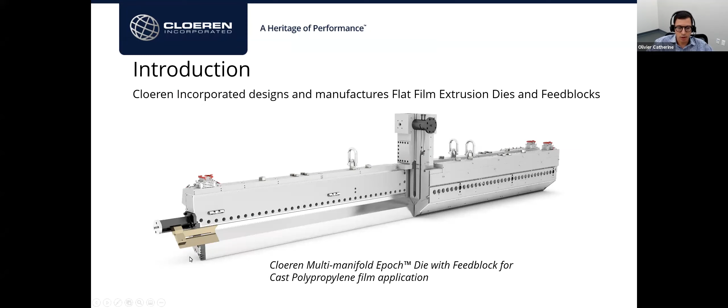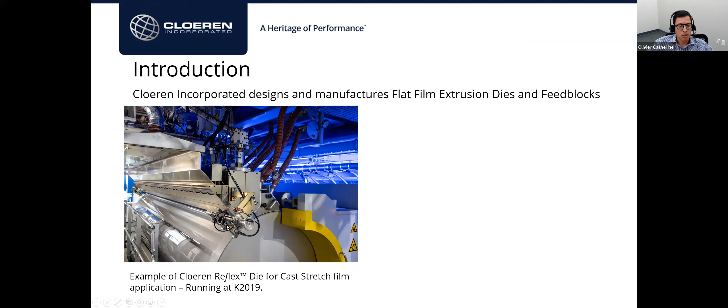So many applications are coming from our products. For example, cast stretch film, as I mentioned, is a big application for us. But there are many, many other applications where cast film and sheet is used by our customers, produced by our equipment. For example, here's a PVB interlayer that's used for lamination of glass panels for windshields.

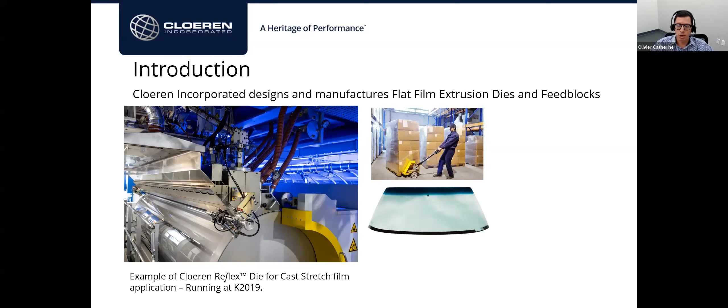Medical applications such as blood bags, a lot of flexible food application, as well as other food applications such as milk cartons and rigid packaging.

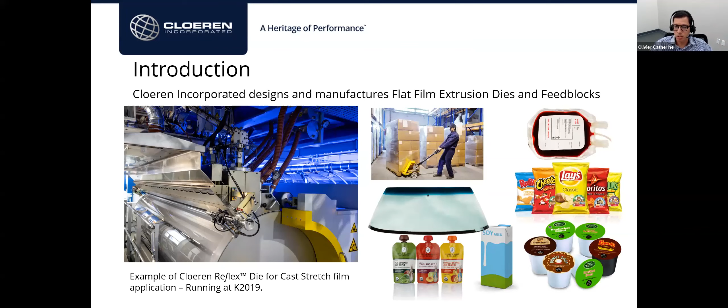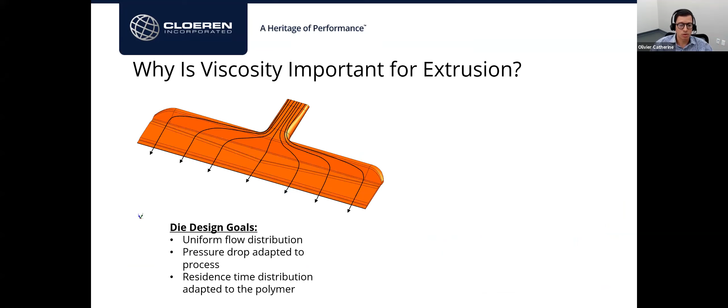So why is viscosity important for extrusion? When we design dies, we are really trying to optimize many things. The main goals are really to design a die flow channel that will deliver a uniform flow distribution. Also, the pressure drop through the system needs to be adapted to the process and the material. And finally, a residence time also needs to match what the polymer can tolerate for this application.

So if you look at a simplified system, simplified equations to calculate pressure drop through such a system, which is made of a manifold, which we can simplify into a pipe flow, the pressure drop is directly related to the output or the flow rate through the viscosity parameter.

In parallel plates, such as the pre-land or the lip land, you can also link the pressure drop through those sections of the die to the flow rate locally through polymer viscosity.

These equations are simplified for Newtonian fluids, and in most cases, polymers are not. Also, viscosity is shear dependent, or shear rate dependent, and also temperature dependent. But the point is that viscosity is critical to size and optimize the system to reach the three goals that we just described.

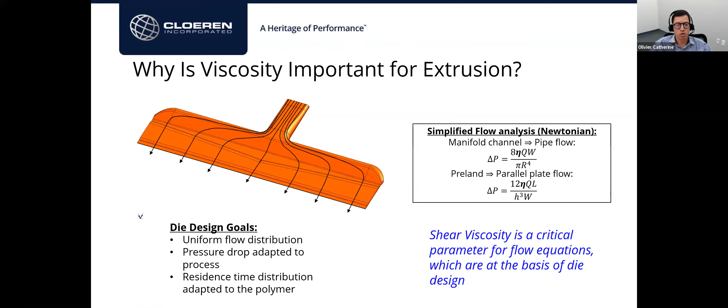Polymeric materials are non-Newtonian materials due to the fact that they are macromolecules. As you're gradually shearing these macromolecules, you're starting to disentangle the macromolecular structure, and when you do that, the structure will tend to recoil. There's a competition between how fast we are disentangling the system due to shearing and how fast it can recoil.

This is the shear thinning effect. You can see the viscosity is initially at low shear rates Newtonian, then starts to shear thin. Eventually we are shearing the material so fast that everything is disentangled, and we reach another theoretical plateau at low viscosity and high shear rate. For polymer melts though, we rarely see that plateau because we are in a shear rate region that's more covering the Newtonian plateau, the transition region, and the shear thinning region.

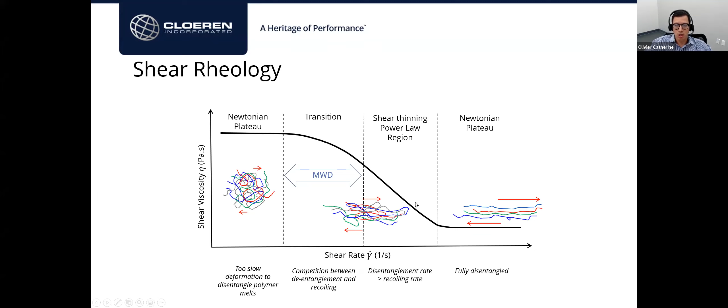So what are the typical measurement techniques available in our market? Well, the first technique that's very widely used is the melt flow index. But I'd say that this technique, even though it's a standard, has very low value to us.

The way it works is as shown here - it kind of looks like the COVID vaccine a little bit, huh? You are melting a polymer and pushing it with a standard weight, collecting the material coming out for a time of 10 minutes and measuring that weight. So you have a pretty meaningless unit of grams of polymer per 10 minutes with this size of weight that you used at a given temperature. So it's very hard to translate that number into something meaningful to design or troubleshoot any process.

However, it's an industry standard, and it's a simple way to quickly compare different polymers, and or within the same family, let's say, and also to do some QC for example. Although I think there's different or better ways to do that.

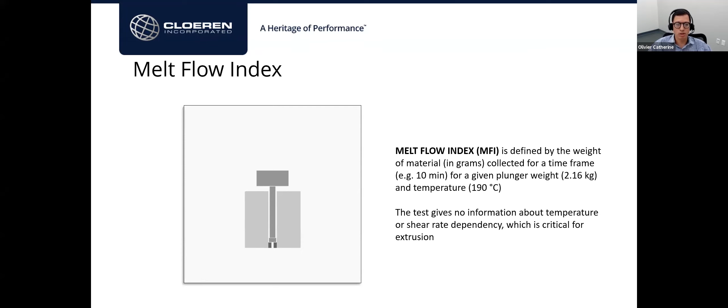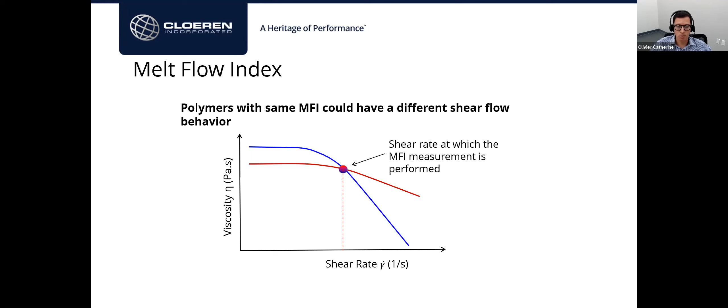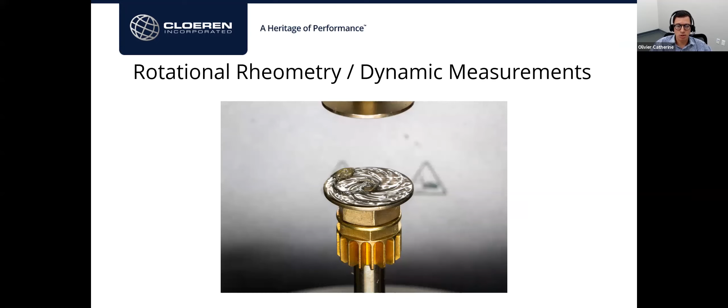So other techniques that we, for example, use in our lab here: rotational and dynamic measurements. And the main reason is that this technique can bring a wealth of information regarding viscoelastic behavior of the material.

So there's different ways to perform measurements, but here I'm showing a typical setup where we use either a cone and plate or a parallel plate geometry, and we use the equipment in small amplitude oscillatory shear experiments. So basically we are shearing the material at a frequency, and we're going to vary that frequency.

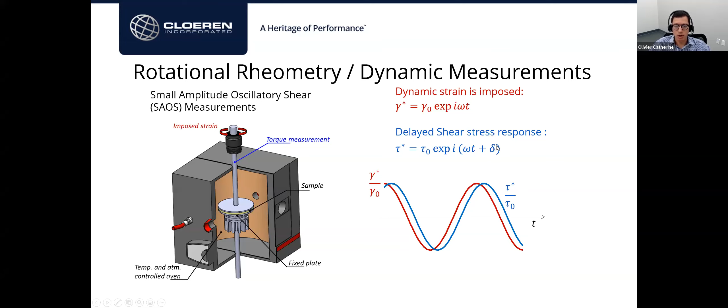This is a representation of the strain and response in shear stress for the material. The main thing is that as we impose the strain, we are going to see a delay, a shift in time for the response in shear stress, which is shown with this delta value. From there, we can derive many viscoelastic parameters that are quite interesting.

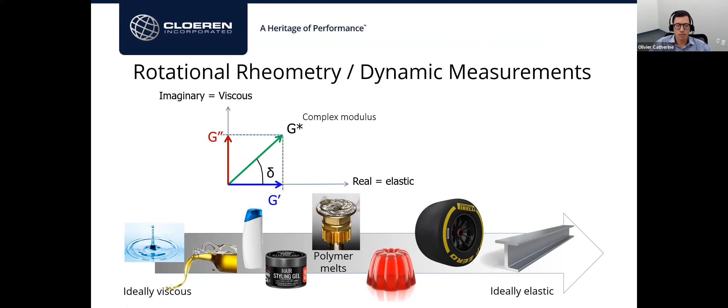So what we are representing here is the different components of the complex modulus: the G double prime, which is the more viscous component of the modulus, and the G prime, which is the elastic component of the modulus.

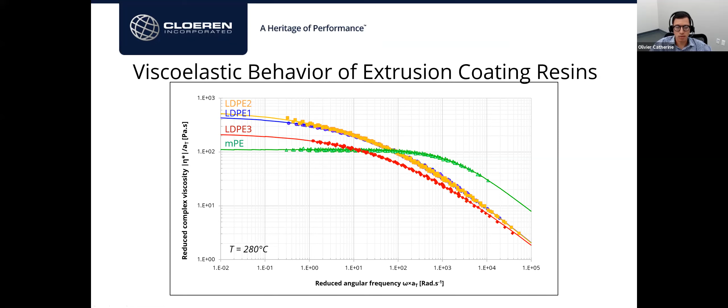All right, I will really talk about capillary rheometry very soon, but I'm trying to cover all the different techniques here. One nice feature also about these type of rheometers is you can change the instruments or the measuring devices and have access to a lot more information. And also you can explore the molecular structure of your materials.

For example, here, a tool I really like is being able to measure transient extensional rheology. And the way it works, we basically use a piece of film of a given sample and melt it in a convection oven, and then we start stretching it with those rotating drums.

We could see what's going on in the oven there, and once the polymer is melted, we started stretching it and measuring torque. As we do that, we are able to convert those values into a transient viscosity over time, and compare that to the Troughton ratio, which is basically the shear viscosity multiplied by 3. We are able to detect or compare behaviors of materials in extensional mode.

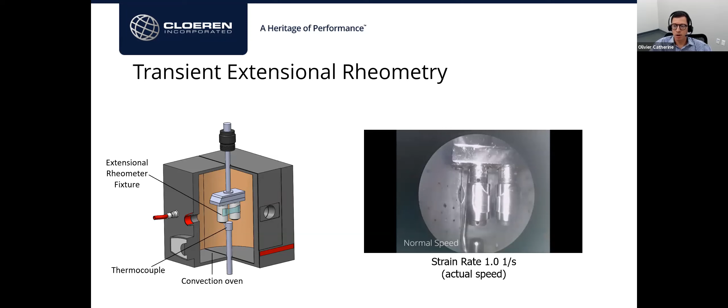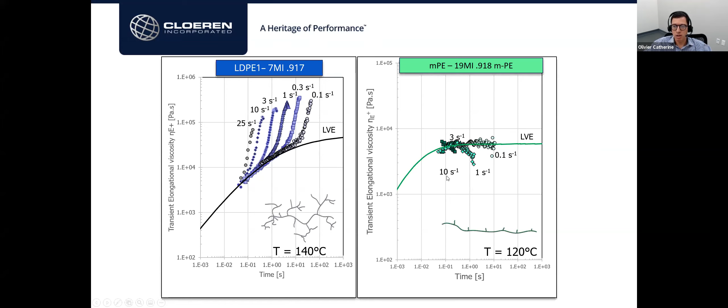As you can see here, the metallocene grade, very linear molecular structure, did well. The measurements were actually quite difficult, but you can see that there's no strain hardening at all at any strain rate. So these tools are really great to compare viscoelastic behaviors and investigate the molecular structures and relate that to processing.

All right, capillary rheometry, which is really the topic of today. I put here a picture of the new Netzsch RH 2000 and 2200, which is basically a dual bore version. This is the rheometer we use in our lab, and a great rheometer to complement all the techniques. We use both our rheometers all the time, but this is a very busy piece of equipment.

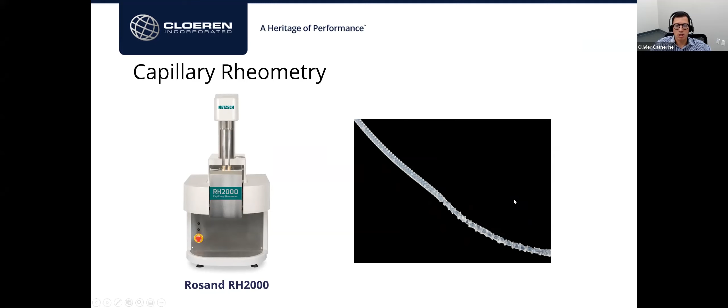Here's an illustration of melt fracture. This is one nice feature you can detect or observe in the rheometer.

So the principle is similar to that of the melt index, except that this now is instrumented. So the principle is that we load the polymer pellets in a barrel, in a heated barrel. The temperature of the barrel is controlled very precisely through a precise controlling system and measurement system, a thermocouple embedded deep in the metal of the barrel. Once the polymer is melted, we push it, but the main difference compared to the melt flow index is that we're not using a weight there, a dead weight. We are using a controlled speed system, so we are able to control the speed very precisely. And through that, we control the flow rate, and the polymer is now flowing through a capillary die.

So this is a little too small, so if you move to the right side here, you have a blown up version of this picture. The capillary die is a very precise channel of known dimensions, namely the length and the capillary diameter. And from these features, we can calculate shear rate.

As we are pushing the material at a controlled speed, we are measuring the pressure that is resulting from this flow. The pressure is measured through that membrane type pressure sensor. And from the pressure, we are able to calculate the shear stress. And the viscosity is basically shear stress divided by the shear rate. So this is fairly simple in theory. However, there are some corrections necessary to get to the most precise, most meaningful measurement.

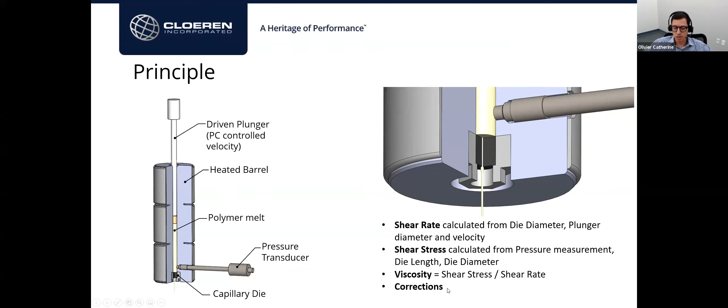The first correction is the so-called Rabinowitsch correction. So when we calculate shear rate, we actually apply, again, simplified equations that assume the material as being Newtonian. And the equation only uses the flow rate of the material and the radius of the capillary or the diameter of the capillary.

But as we are dealing with non-Newtonian materials, the velocity profiles are changing as the material is flowing through the capillary, as shown in this graph here. So a fully Newtonian material would be that dark purple color. And as the materials become more like shear thinning materials, more pseudoplastic or less Newtonian, you can see that the velocity profile tends to flatten, and eventually, even for a completely pseudoplastic index of 0, you have this black line here. Now, shear rate is the slope of this velocity profile at the wall. So as you can see, the shear rate is affected by how non-Newtonian the material is, and the slope increases as the material becomes more and more pseudoplastic or less Newtonian.

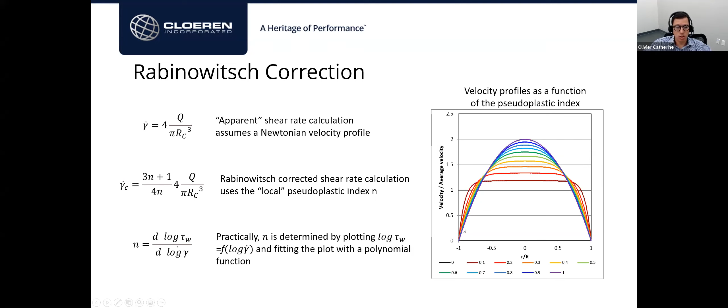That's the correction proposed by Rabinowitsch, which uses the n value, a local pseudoplastic index. Physically, or practically, how do you do that? You basically calculate the n value with a polynomial fit of the log of the wall shear stress as a function of the log of the apparent shear rate. You fit this and you're able to determine the n value. And of course, there are different ways to fit that. You can do linear fits or a higher degree polynomial fit. So this is what I'm showing here.

The second correction is a so-called Bagley correction, explained by the fact that the pressure sensor is physically limited to a location upstream from the capillary die. Of course, when we want to calculate the shear stress at the wall of the die, we would need to use the pressure drop through the die. However, the measured pressure, because of the location of the sensor, is a combination of different features.

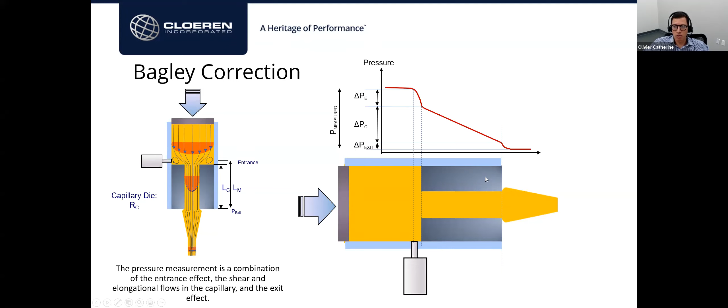The Bagley correction consists in trying to determine this entrance pressure by changing the L over D ratio of the die - that's the historic Bagley correction. Basically you would plot the pressure measurement as a function of different L over D ratios. You would have to use 3-4 different dies, repeat the measurements, and collect pressure as a function of this L over D for different shear rates. In the end, at the intercept, you can calculate the entrance pressure, or with the slope you can directly calculate the corrected value of shear stress.

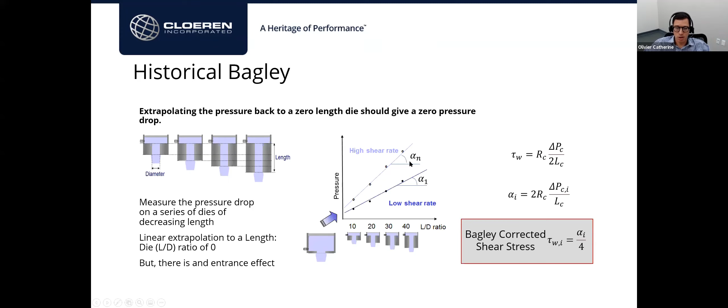This is something I've done a lot, especially when I was in college, and I can tell you it's a lot of work.

Thankfully, on the Rheometer that Netzsch is selling today, you have an option for dual bore, and this is a must, because this dual bore option will give you the ability to measure pressure simultaneously on 2 different bores with 2 different dies with 2 different L over Ds. Specifically, they have an L over D die close to zero - here we call it orifice die or zero length die. It is in fact 0.25 millimeters, if I remember. Basically with this, on the right side of the rheometer you are measuring the entrance pressure, and you deduct or remove it directly from the left side measurement, and you have a 2-point Bagley correction, which is very accurate and very, very efficient.

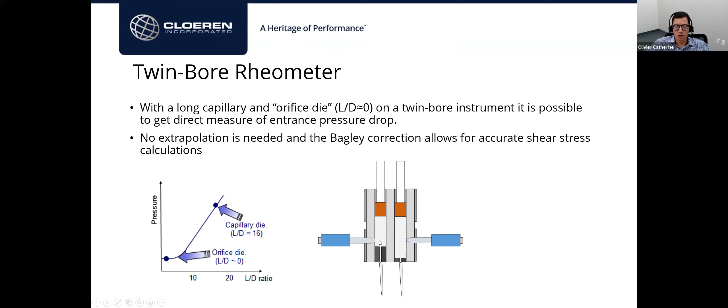In some cases, this can have a huge impact on how you design your extrusion equipment, because at high shear rate, you could have some pressure estimations that are wrong if you're not applying the correct corrections.

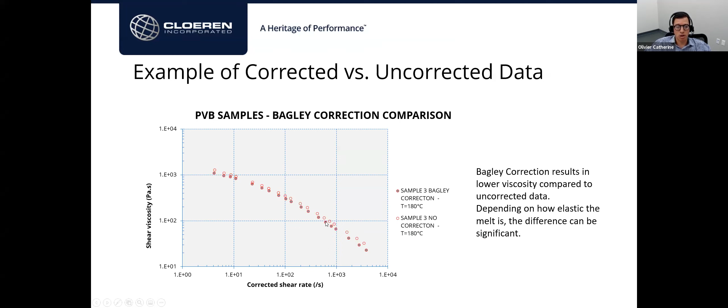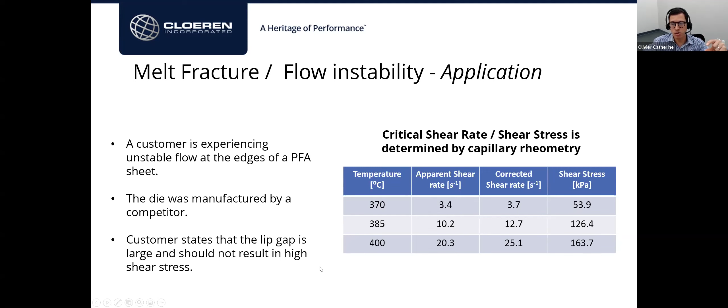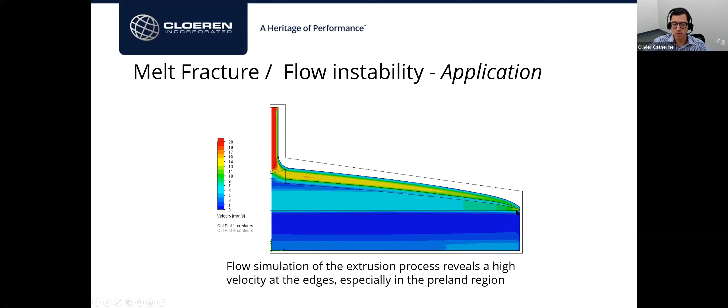When I looked at a map of shear stress calculated from a flow simulation, I found that the shear stress was higher than the critical value in the pre-land region, so not at the die lips, but upstream. So I think what's going on is that we are starting to see some flow instability in the die flow channel, and this flow instability will not dampen but will actually continue to be unstable as the material is flowing out of the die. And that's exactly what they saw at the edges of the sheet there.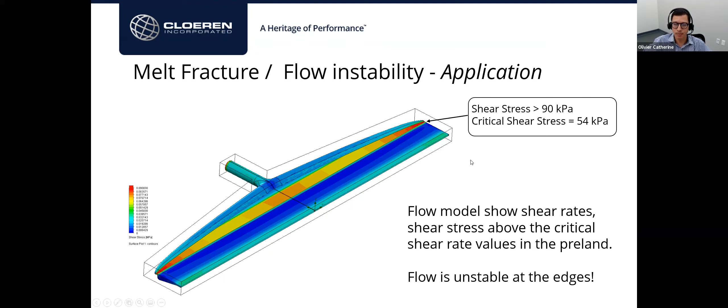Another great feature of the Rheometer is being able to observe how stable materials are. Sometimes it's a fight because we have material that tends to degrade before we're done with our viscosity measurements. But I can also use the Rheometer as a device to determine if the material is stable or not.

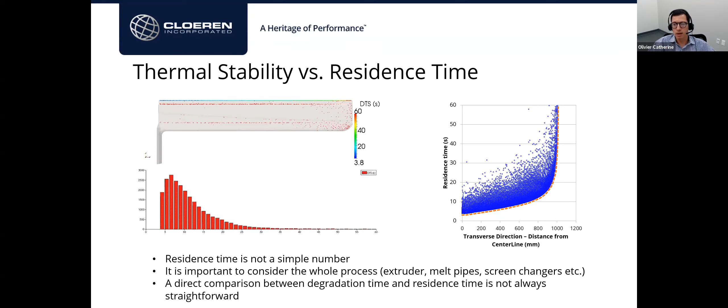So while it's nice to have information on how fast material degrades from rheology, it's hard to directly apply it to the system, or at least we have to keep in mind the system is complex and it's not just a 5-minute residence time. However, you can use this method to compare if one material is stable through the system versus another that's not. Comparing from the rheology lab to the process, you can apply and troubleshoot.

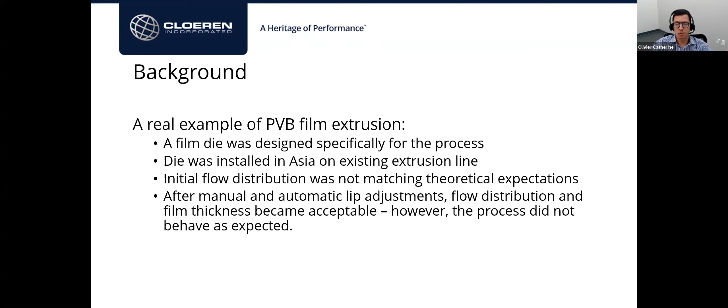I wanted to discuss really quickly a troubleshooting example - a specific case of PVB film that I've done in the past, and I thought it was quite interesting because this is a real-life extrusion application. We designed a die for a specific process, and the die was installed in Asia, so far away from here. This was on an existing line, and we had some very different results with the die, or the system, than we were anticipating.

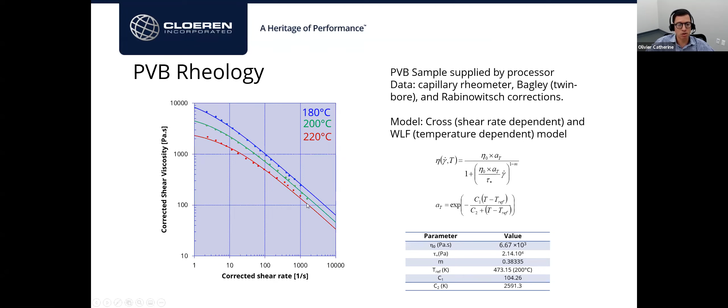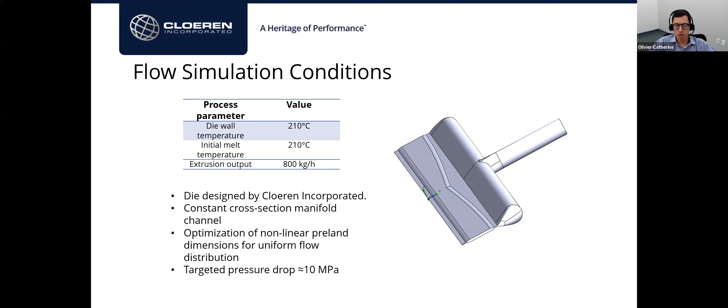From that, we designed a die based not only on the viscosity measurements but also the process information given by the customer. The die would be set at 210, the melt temperature set at 210 C, extrusion output is 800 kilos per hour, and we designed the die, optimizing the flow channel with the 3 main parameters: uniform flow distribution, pressure drop - in this case targeting 10 megapascal or 100 bars - and of course a residence time that makes sense with the temperature and material sensitivity. These materials seemed fairly good, actually.

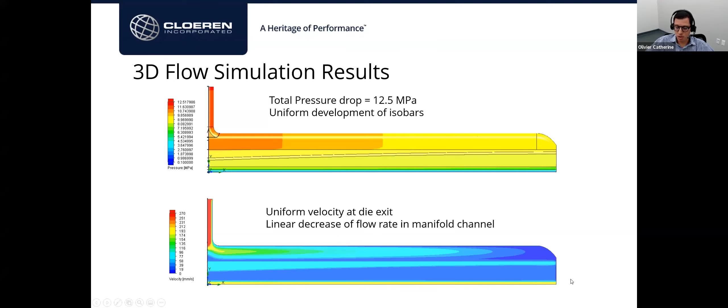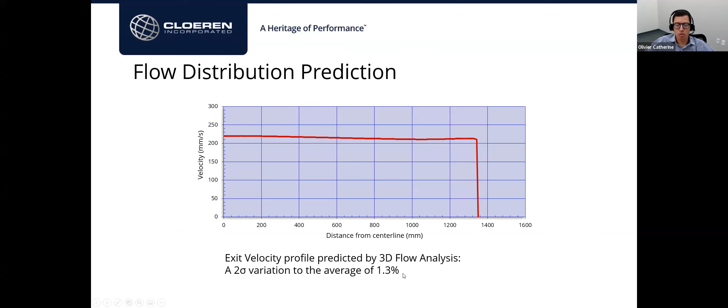Here's the result: we have a pressure drop of 12.5 megapascal, which is very nice, and a very uniform velocity at the die lips, computed from commercial 3D computational fluid dynamics. Same results showing here, a plot of the velocity distribution at the die lips. Compared to the theoretical design, we have a flow variation of 1.3%, which is basically nothing.

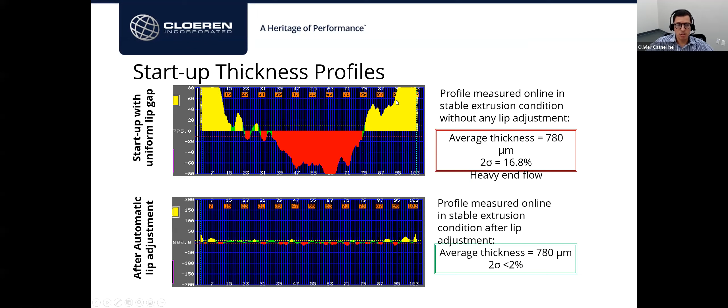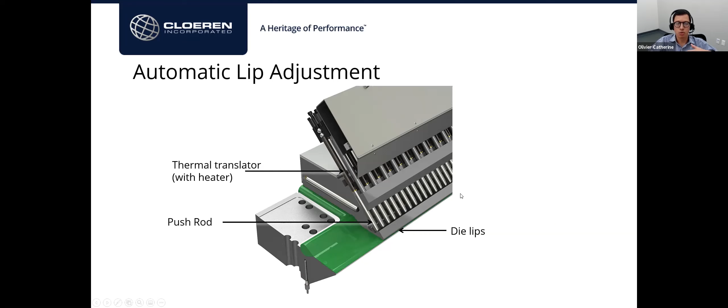This is an illustration of the lip adjustment system and the automatic thermal system that's based on a feedback loop from the online gauge measurement, and the die will be adjusted every inch. We can adjust the gap of the lip.

So what did we do from there? Well, we suspected that the material melt temperature was not what they were specifying. So we used two techniques to characterize that: measuring the melt temperature in the flow itself, and also measuring the melt temperature in the air gap as the material came out of the die, using IR imaging. Finally, we wanted to make sure that the material they were actually extruding that day was the same as the one we designed the die for.

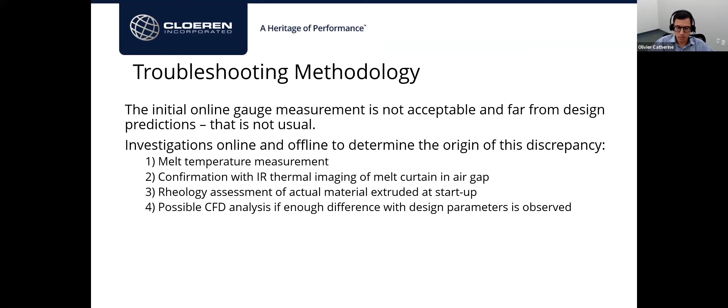So this is a simplified layout of this PVB process. It's a twin screw extrusion using a gear pump and static mixer, so it's a quite complex system. Then there's an adapter, and then the die, and the material comes out into a water bath.

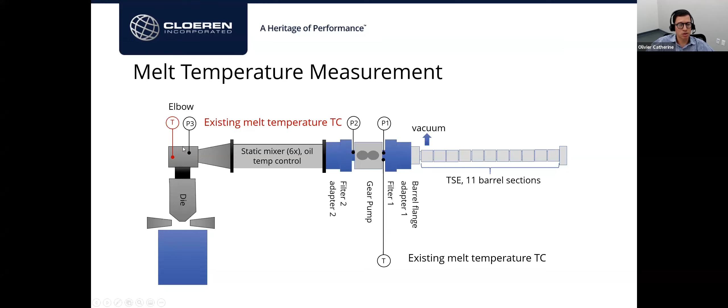We measured the melt temperature as close as possible from the die entrance. There was an elbow there with a port we could use, and we used a variable depth thermocouple. This device is very useful for extrusion troubleshooting. We can measure the melt temperature at different locations within the melt.

And we can plot this profile, from the wall of the melt pipe or the adapter all the way to the center of the flow. Once we're done with the measurement, we recommend strongly retracting the probe. Otherwise, it can get broken during startups, shutdowns, or wrong manipulation.

But the cool thing is that we were able to determine that the melt temperature was higher than what they specified at 210. So 210 was really the target, but due to some poor control of melt temperature, this customer was basically trying to cool the melt in the melt pipe by setting the temperature set point much lower, at 180 C. That's why you see initially near the wall 180 C, and then at the center of the pipe a much higher melt temperature than specified.

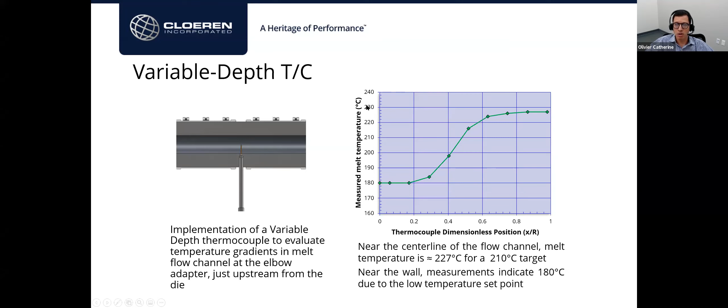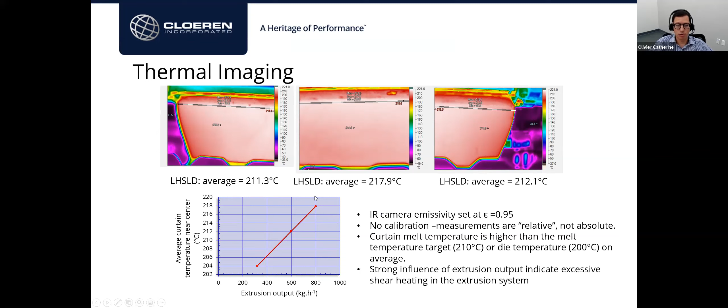This was also confirmed with thermal imaging, but the cool part of thermal imaging is that you can also look at that response as a function of extrusion output, and you can see here there's almost a linear temperature increase as extrusion output increases. This really shows there's quite a bit of shear heating in the system, which is not unusual for these high viscosity polymers.

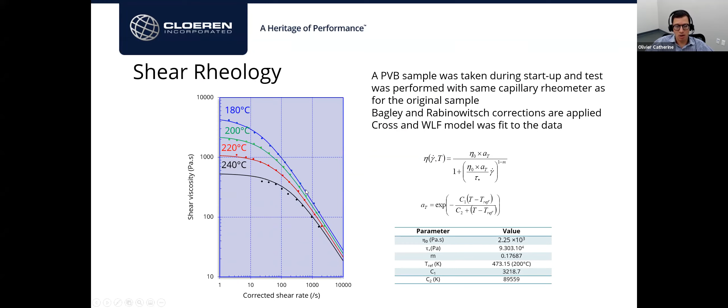Lastly, I was there at startup and picked up some material and remeasured it in my rheometer. Instead of three temperatures, I did a four temperature characterization and applied again the Cross model. What was interesting is that PVB is actually a plasticized material, and coming from the twin screw extruder, I believe there's some influence on how that plasticizer being distributed or mixed can have on the flow behavior.

The original material, I still don't know exactly how it was made, but the startup material was coming directly from the line and was really a true characteristic of the extrusion process there. Even though it was the same formulation according to the customer, it seems like the process did change something. So the new material we characterized showed lower zero shear viscosity and also, quite interestingly, higher shear thinning effect.

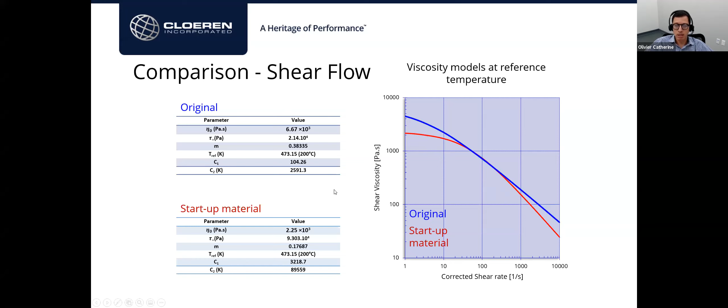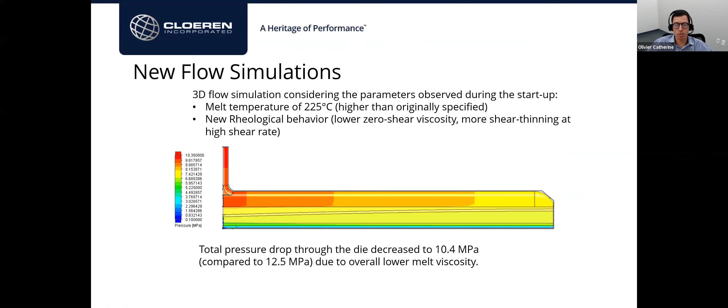So when I took into account all these changes, higher melt temperature and change in viscosity behavior, I found a lower melt pressure compared to the 12.5. We predicted 10.4 megapascal, so it's about 20% reduction in melt pressure. And regarding velocity, I can see also a trend, which is a much higher end flow.

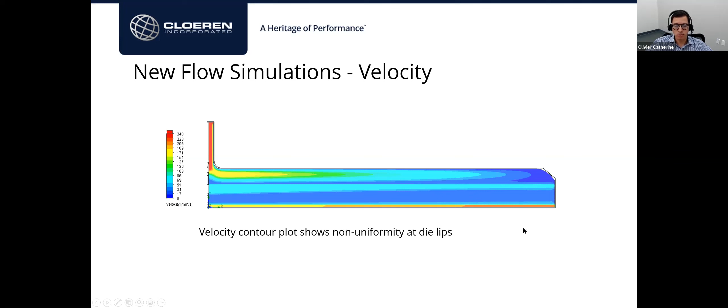So if I plot this velocity profile at the die exit, I can definitely see the combined effect of higher melt temperature and new viscosity behavior, and see that there's definitely a resulting push towards the edges. The actual two sigma calculation for this profile is about 15%. It's not that far from what they observed at 17%. So I was quite excited to see a good match like that.

So from there, we have a good, solid data point, and we can go back and correct the die flow channel for their process, or see if there's any adjustment they can do on their extrusion process to minimize the shear heating and also avoid that temperature mismatch they were trying to cool the melt from.

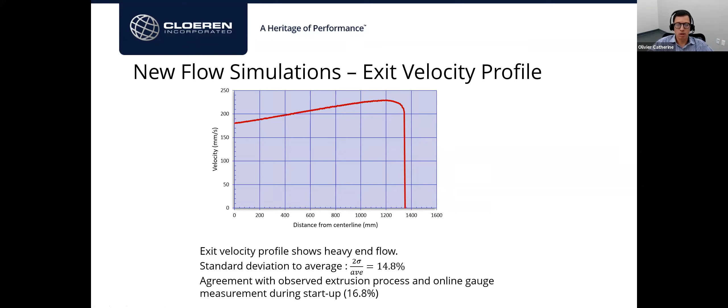So in conclusion, I think I've shown today that rheology and flow characterization of polymer melts is a very important piece of extrusion equipment design and troubleshooting.

Capillary and rotational and oscillatory rheometers both have their own advantages. However, capillary plays a really important role and provides a wealth of relevant information, especially for melt fracture, thermal stability, and direct viscosity measurement. There are some necessary, mandatory corrections that need to be done to get the most precise measurement, but that can be done.

Finally, I think a combination of rheology and flow simulation is a strong, powerful tool for design and troubleshooting. We've been using this for years now.

One point I want to make is that data interpretation is as important as the accuracy of the data itself. For example, when we measure flow of polymers and see very strong shear thinning, we have to understand where that shear thinning is from. When dealing with highly loaded melts, like almost polymeric slurries or materials with very high concentration of solids, we can have some very strange flow behavior at low shear. We need to understand that, and the way you interpret and model this data is quite critical.

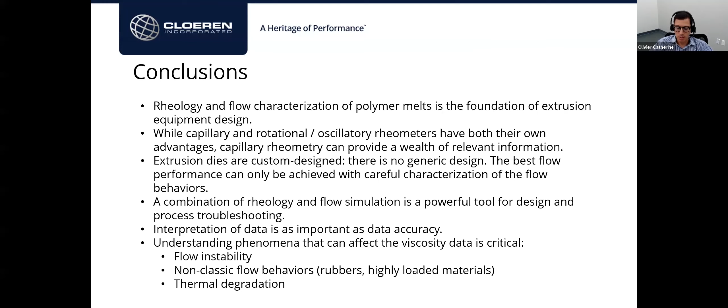The first question: is it possible to process the melt at such high shear rate that it will completely lose its memory and become purely viscous, even when the acting shear stress is removed?

I'm not quite sure I fully understand the question. So maybe what I propose is that Deborah could send that question to me, and I'll think about it and answer, because I think there are a few contradictions in that question. The memory effect is linked to elasticity, right? So a material that has high viscosity could end up with a lot of melt elasticity and a very strong memory effect. So I'm not sure I quite capture the question.

Sure, maybe. Yeah, it was submitted anonymously, so whoever submitted it, if you want to contact Olivier with his contact information there, or resubmit your question with more clarification, that would be fine. Yes, thank you.

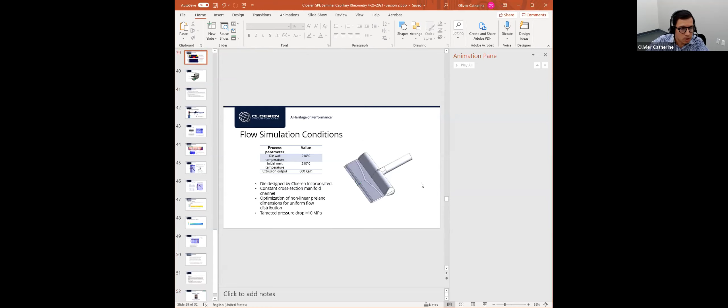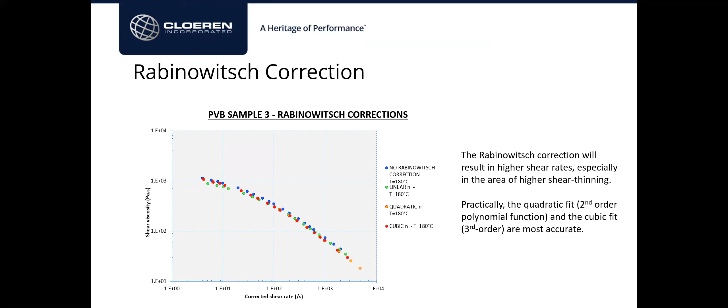Can you please comment on the degradation experiment and thermal stability with additive in regards to molecular structure? Just curious why the pressure increases. Yes, that's a good point. We see degradation going both ways - in general, the viscosity is changing, or the pressure is changing over time.

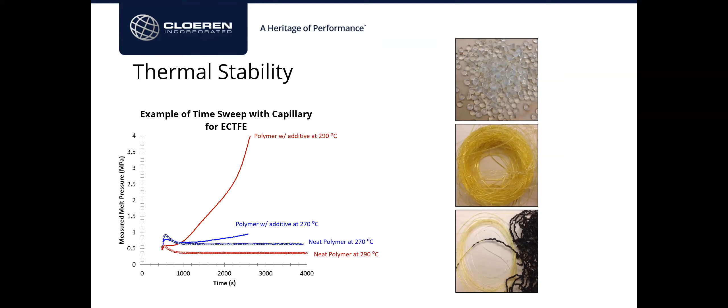I think the best way would be, if possible, to do some sort of in situ measurement from the extrusion where you compound the material, and with the same compounding machine, if you were able to online attach a rheometer die and do the measurement there, that would be the best way. However, you could also compound the material with a specific machine that's representative of the extrusion process, collect this material sample, and then process it or measure it in a capillary rheometer. That will work as well.

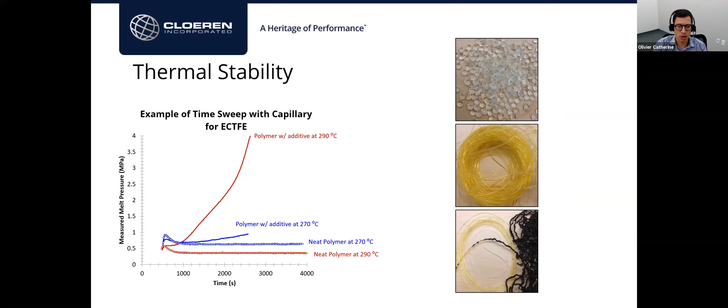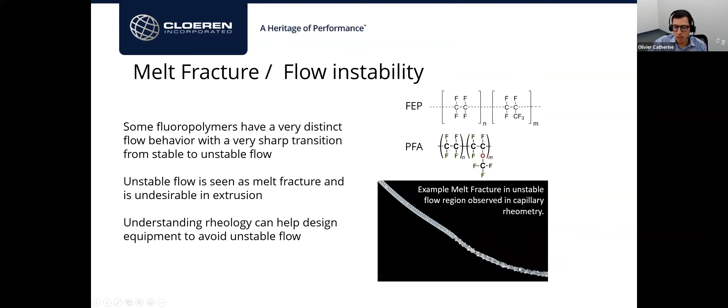Next, how do you identify critical shear rate for a specific polymer? Well, I thought I explained that. Basically looking at the pressure graphs as a function of time, you could see the oscillation and characterize basically unstable flow. And then at some point the flow becomes stable, and this actually matches the extrudate. So you see that type of melt fracture going on, and then at some point the flow becomes stable, and the extrudate becomes smooth. The transition between the two is your critical shear rate or shear stress, and that's one method to do that.

Okay, next, how can a melt fracture be anticipated? I don't think it can unless you are doing this type of experiment, and that's the whole point. That's one big feature of the capillary rheometer, I think, compared to rotational rheometers, where you can physically see the melt fracture. You can see the extrudate coming out and melt fracturing like crazy. You can see stick and slip phenomenon, you can see when the flow is unstable. So that's how you anticipate it. Just looking at the molecular structure or the MFI value, forget it — you have to run this characterization.

Next, is there something in the polymer design, for example, molecular weight distribution, viscoelastic behavior, branching, additives, that could help avoid the phenomena of die buildup in a BOPP process?

Well, there's two things for die buildup, and so I have to look at the BOPP process. The skin layers are usually a little bit lower MFR than the core layers, but they're still in the 7 to 8 range.